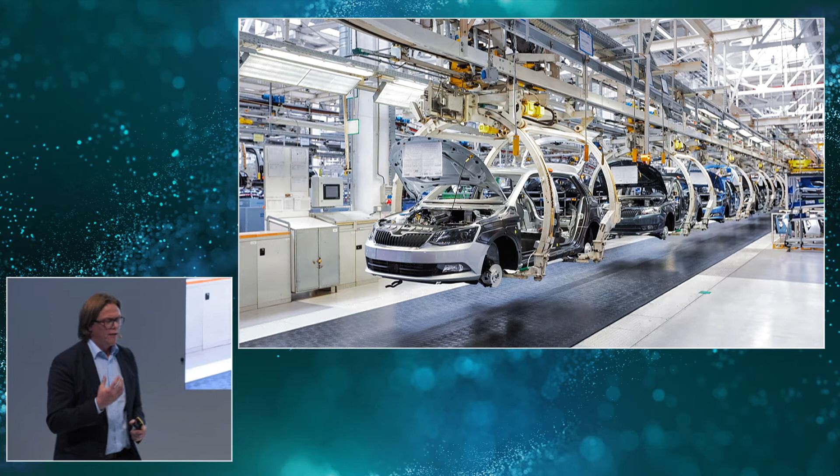So if you take into account the fact that you may have to integrate battery assembly in this type of environment, that could be a challenge. Perhaps the complete concept needs to change, and perhaps you need to take into account AGVs, automated guided vehicles, in the facility.

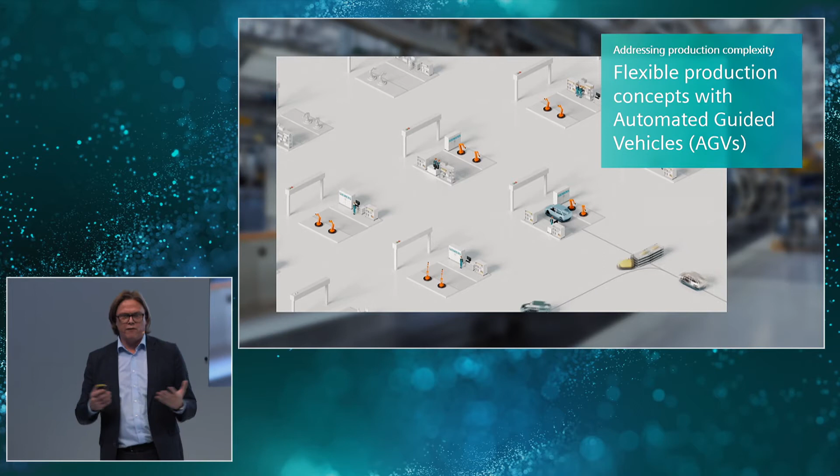If we were all here to order a car, or define the car we would like, same brand, none of us would probably put together the same type of vehicle. Those AGVs enable this type of flexibility, so for example your car will go to the station where you have the components you have selected. The same goes for you, so the cars will be driving around.

Obviously this movie is more like a schematic view, or like a vision slide. But this is actually something we support today with our simulation solutions. This is Tecnomatix Plant Simulation, a tool for optimizing the flow of material through a factory and optimizing energy consumption.

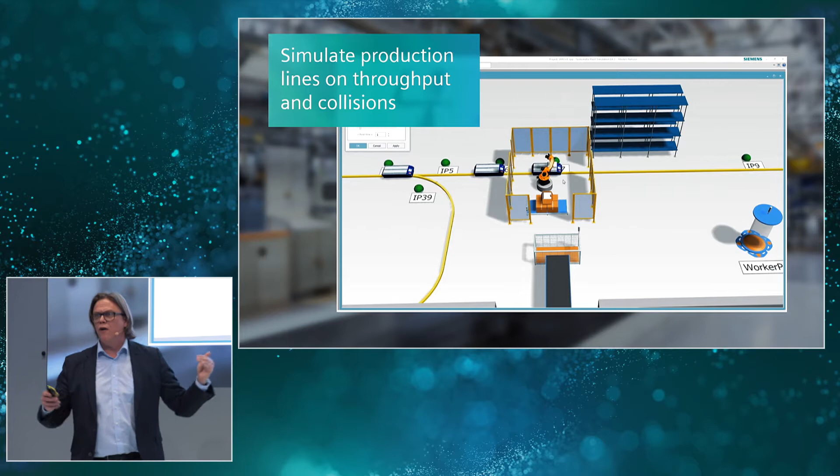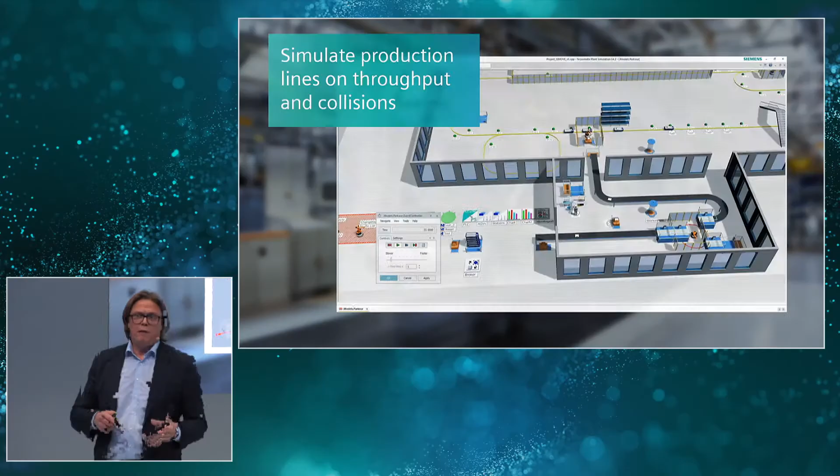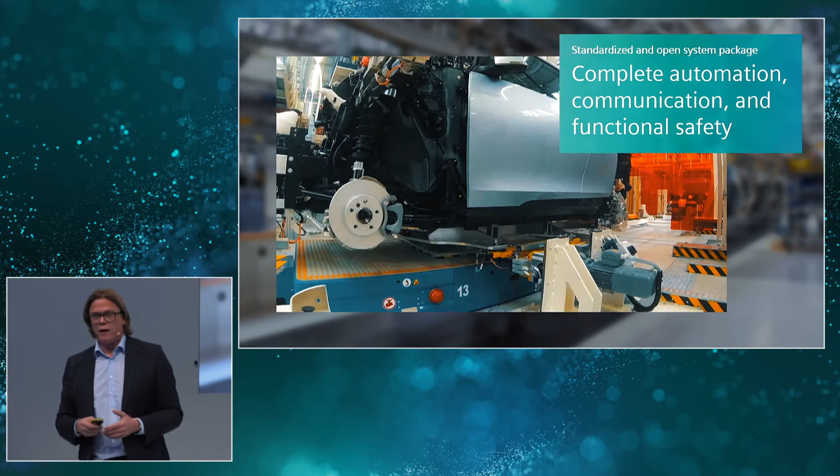We can also program those AGVs to work in this digital twin of a factory to see what roads they take and how they do their work fast and swift, in order to make sure that the product you have ordered comes out. It may be a simulation, but this is also something used for real in many areas. Those AGVs are equipped with Siemens components and enable this type of flexible manufacturing, making sure we meet the market requirements when it comes to products.

So simulation as such has a lot of benefits. You work in a digital environment, you simulate and you get validation, which is really an image or a mirror of reality, faster validation. You can test different what-if scenarios, scale it up, scale it down, see what money you can save or win. And of course, if demand is increasing or decreasing, you can adjust your production along those lines. That was my first use case for today.

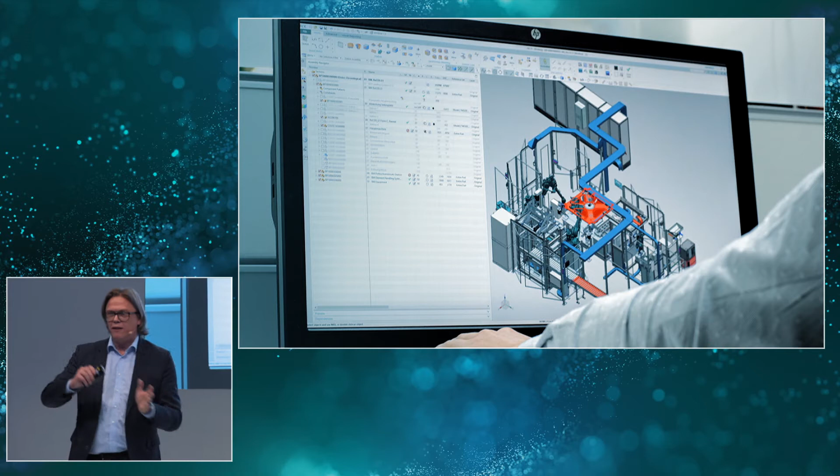Now we're going to move into the machinery industry. One of our customers, Rosendahl, an Austrian company, has been in the business of building machines for many, many years. They're extremely skilled at what they're doing and know the business from beginning to end. They worked along those lines for 30 years and thought they did everything in the most optimal way.

Then they started working with digitalization solutions, and in particular the Mechatronics Concept Designer, which enables you to connect the mechanics, the automation, and the electronics in one product. Using Mechatronics Concept Designer, they reached new targets, new goals that they didn't think were possible.

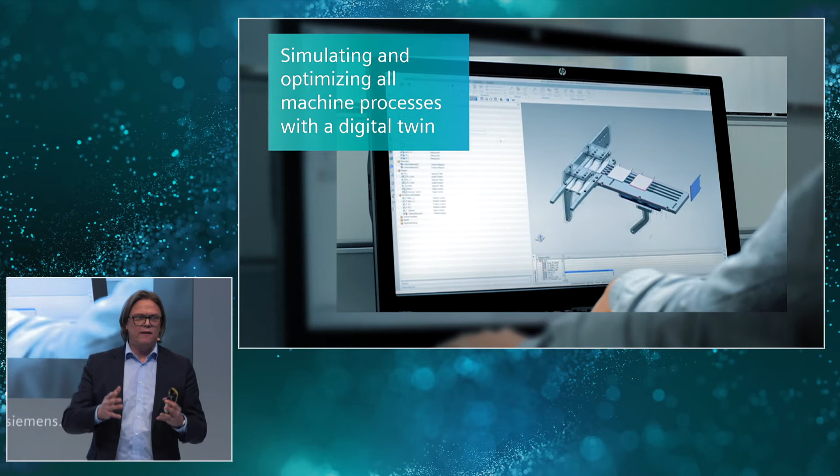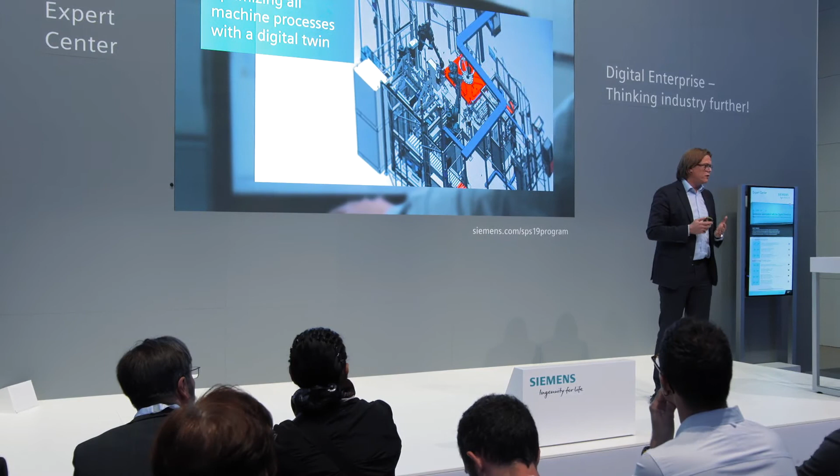Basically, taking into account those cross-discipline entities, making sure the team is working closely together all in one package, working with the TIA Portal, which you've probably seen here on the booth, working with PLCSIM Advanced, which is a virtual controller, making sure they validate the different concepts of a machine in the digital environment long before they even build a prototype.

And this saved them a lot of time and a lot of money in the long run. One very prominent number is that it used to take about 2 years, 24 months, to develop a machine, and using digitalization they actually put it down to 12 months. So that is definitely a good example of continuous optimization.

The effect, as I said, is 50% shorter development time, and they also managed to increase the efficiency rate of the machine itself and also the output of the same.

Second industry ended. We're going to move now to a very, very cool industry: additive manufacturing, which, according to me, may actually be the coolest thing invented since sliced bread came to the market. If you look at this, if you would try to make a mold to create this type of burner head, it would be very difficult, probably even impossible.

But with 3D printing, you can actually do this, and build the most amazing models based on nature, for example. If you look at it closely, it actually looks like a fennel, you know, what you get in fish soup from time to time, this very nice vegetable.

That's kind of the idea - taking nature's approach and designing products. However, there's still a lot of work that needs to be done in this.

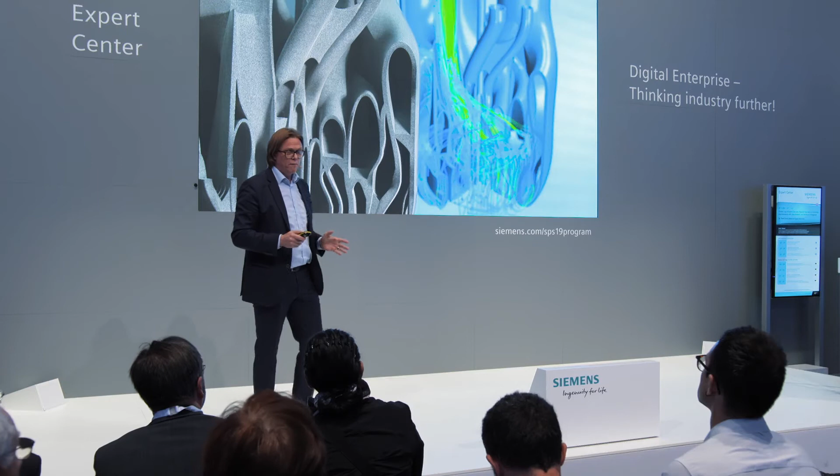When you do this type of work, a lot of dust gets stuck in the model. Dust that has potential to be damaging for a human being. You don't want to breathe this in. You definitely want to reuse it, and you want to make it quick.

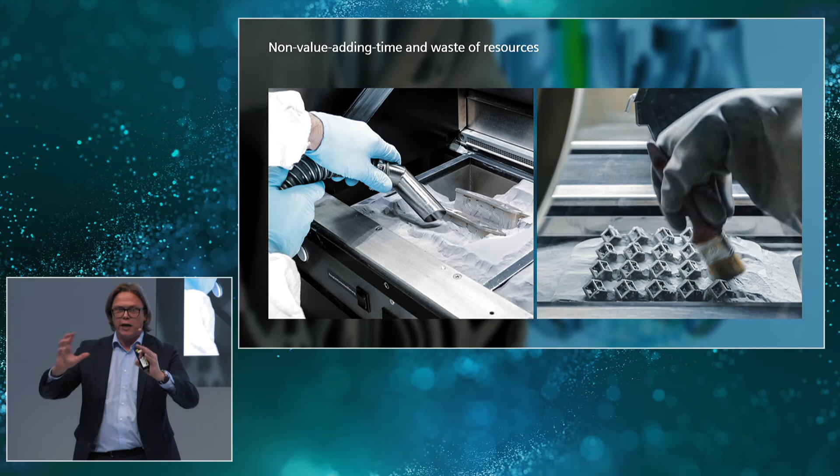In this case, you probably think, why don't you take that tray and just shake it around and the sand will fall out? Could do that, but if you have this fennel, it could be like this.

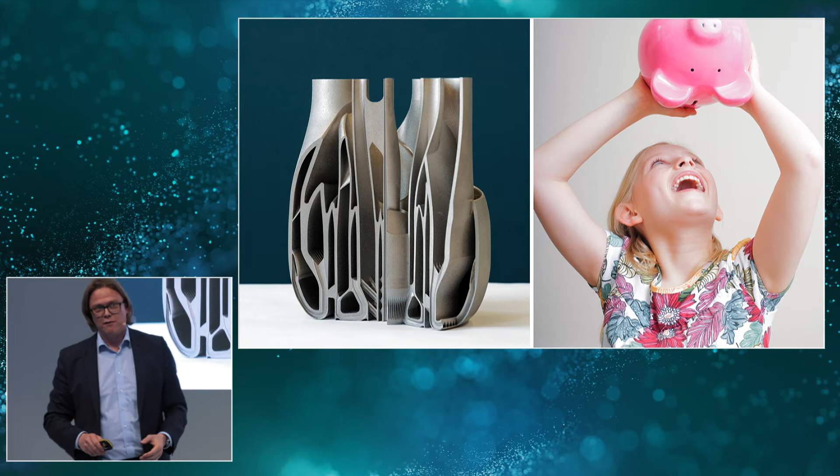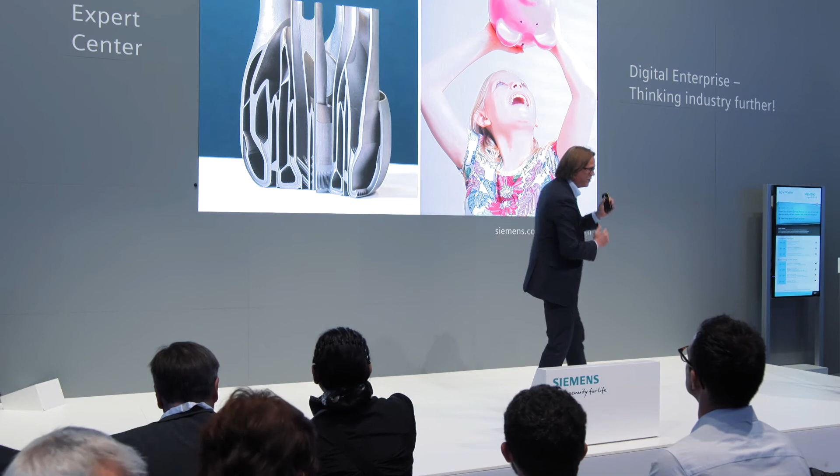When I was a kid in Sweden, quite a long time, many, many years ago, Saturdays were the day when you could go and buy sweets in the shop. And then you took your piggy bank and you shook it, hoping that something would fall out. Sometimes it did, sometimes it didn't.

I didn't know that there were algorithms at that time, but we at Siemens do have people that are extremely skilled in developing algorithms. So they took on this challenge: how can we make this even better, this process of taking the dust out of the printed parts?

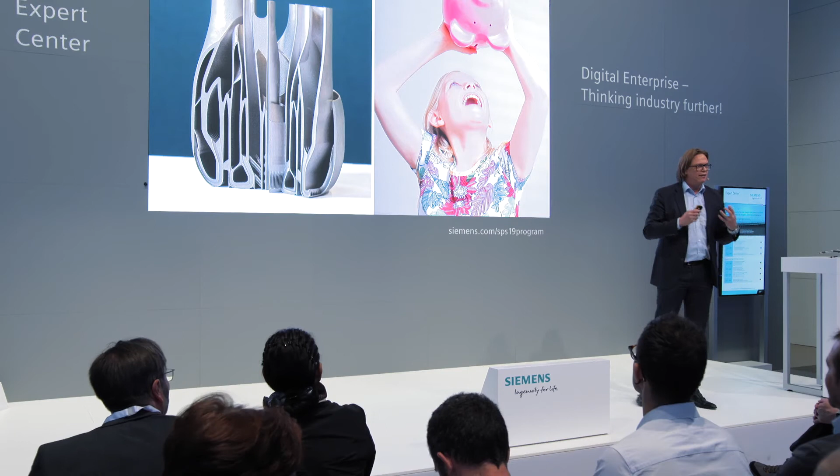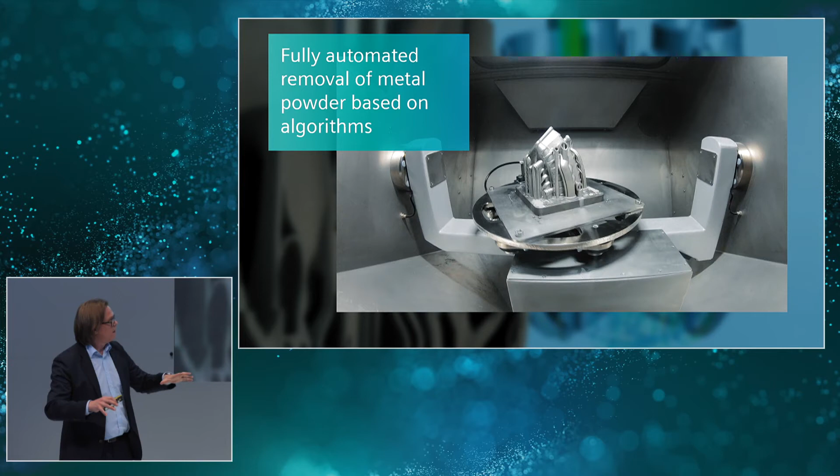So they started thinking, playing with algorithms, and came up with the idea that if we turn this in a particular order, then the sand will fall out. And the result is this: a machine used for 3D printing, obviously equipped with Siemens components. I don't need to say that, but I say it anyway.

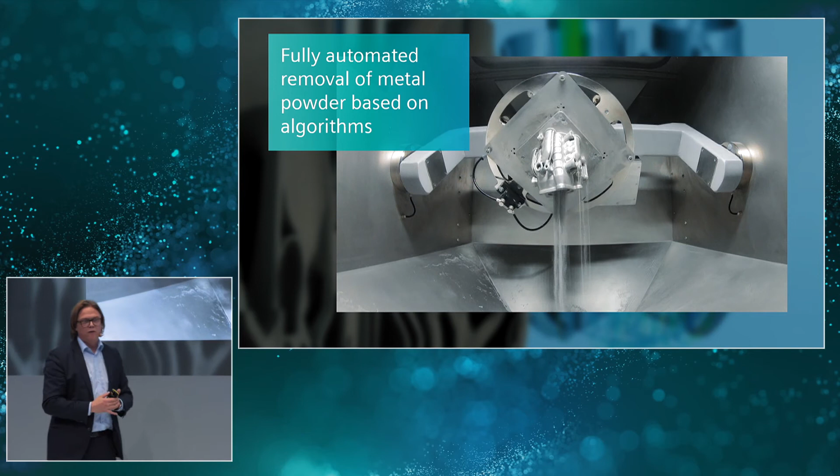This is vibrating, and there's a pattern behind it, an algorithm that makes sure the sand falls out. The longer you look at it, the more relaxed you will feel, because it's a very relaxing feeling, how this flows out.

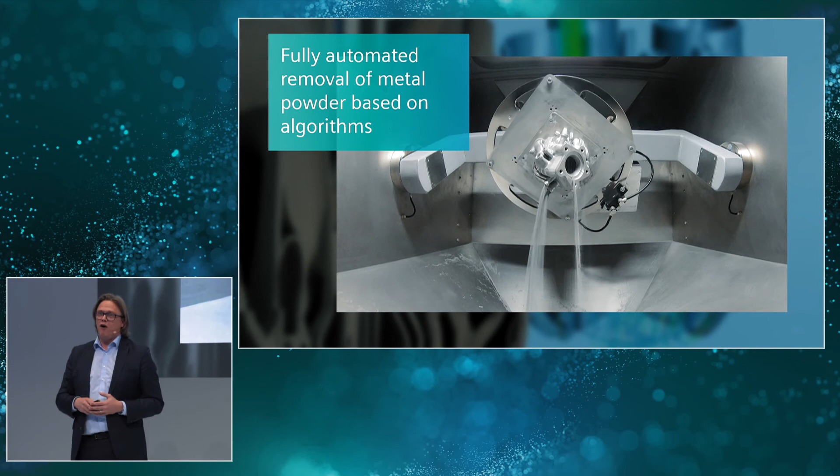And obviously, this is also a very good example of continuously optimizing a process. So what benefits do you have? Surely, you will reduce the damage that could actually affect the human being.

You don't have to breathe it in. There's no manual work needed. Reusing the powder much more easily, and also no harm to the environment. So this is definitely something we're pushing.

All those things I've been talking about now have something in common, and that is continuous optimization. And what makes this all possible, I'm sure you know it, is actually to embrace digitalization. And that's something you can do in this hall.

We at Siemens have been working on this approach for many, many years. Usually we go along a value chain, because every product, even this clicker, needs to go through the stage of product design, manufacturing planning, engineering, execution, and services. And when data is flowing back and forth and up and down, the digital twin comes to life.

I would say that we at Siemens are a company that masters the digital twin top notch. We're very good at it, because the vision to merge the virtual world with the real world has been ongoing for such a long time. And we have all the software and the hardware, and of course also the competencies to make this happen.

And when they talk to each other, then those three twins come to life: the twin of the product, which is designing, optimizing, simulating a certain product. It could be a car, it could be a bus, it could be a clicker.

Then the virtual production, building a digital twin of your facility, being able to work with this plant, optimizing, testing, and simulating. And then real production, automation, the TIA Portal also plays a very important role here, connecting the virtual with the real world.